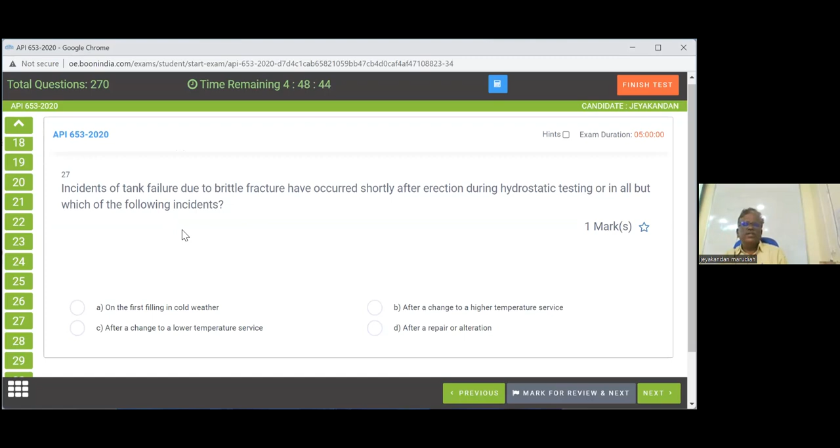Incidents of tank failures due to brittle fracture have occurred shortly after erection, during hydrostatic testing, or in all but which of the following incidents. So when is there a possibility of brittle fracture on first filling? Possible. After a change to lower temperature, or after change to higher temperature, it is not possible. Lower temperature, first filling, repair or alteration.

The risk of tank failure due to brittle fracture is considered minimal after what condition. So when is brittle fracture considered minimal? The tank has demonstrated ability to withstand the combined effect of maximum liquid level and lowest operating temperature - not highest. If it can withstand that, then brittle failure possibility is very low, it will not fail brittle. Combined intermediate - no, maximum liquid level - no. This is the answer.

Next, if it is decided to change the service to a more severe service, what is necessary? Consider the need for pneumatic test - no. Calculate the effect - no. Consider the need for hydrostatic test. If you are going for more severe service, you have to go for the hydrostatic test. If you have any doubts online, please ask questions.

Next, if a tank shell thickness is lesser than 0.5 inch and an evaluation in accordance with section 4 of API 653 has been performed, the risk of brittle fracture is considered to be minimal. So below what thickness? 0.5 inch. If it is 0.5 inch, then this is okay.

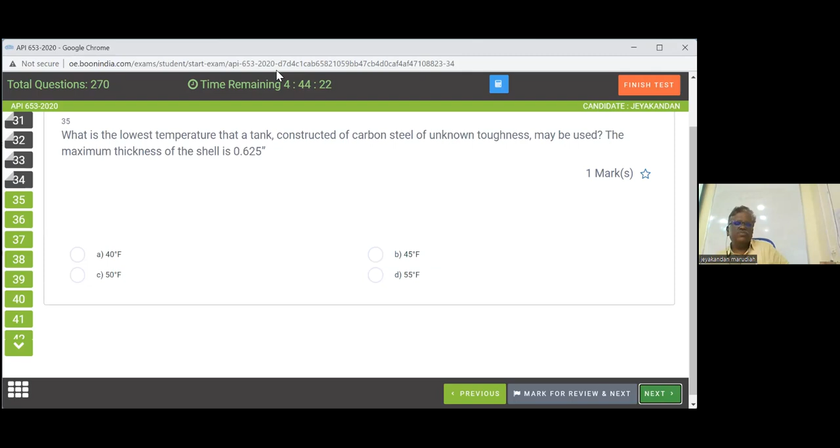Next, what is the lowest temperature that a tank constructed of carbon steel of unknown toughness may be used? The maximum thickness of the shell is 0.625. What temperature can we use? Lowest temperature for 0.625 inch thickness, safe for use. See, 0.625, this is 0.6. Somewhere around 45. So the answer is 45 degrees Fahrenheit.

Next, all new materials used for repair, alteration, and reconstruction shall conform to which of the following? One minute, it's okay, no problem. 36 to 42, 43, 50, 52. No problem, the current bit will fluctuate out. Okay, we'll switch it on again.

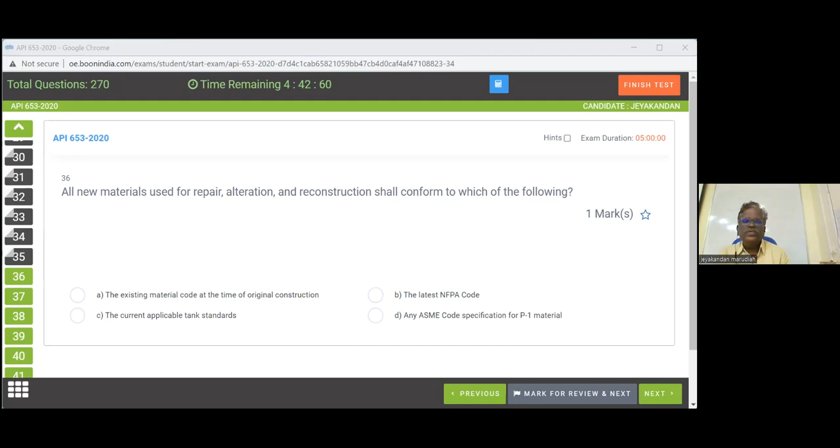So we completed 40, 35, 36 - this is actually from chapter 7. Just to check it, chapter 7. This is from chapter 7, 36 to 42, chapter 7. So the answer is - chapter 6 is later, will come later, no problem. Chapter 7: all new materials for construction shall conform to the current applicable standard.

Next, all shell plates and bottom plates welded to the shell shall be identified. Material identified by any of the following, except, does not require further identification. So, original contract drawing, suitable documentation, API nameplates - so these three are allowed. This one is not allowed. Where it is given, you can see here. Material identified by original contract drawing, API nameplates, or other suitable documentation does not require further identification.

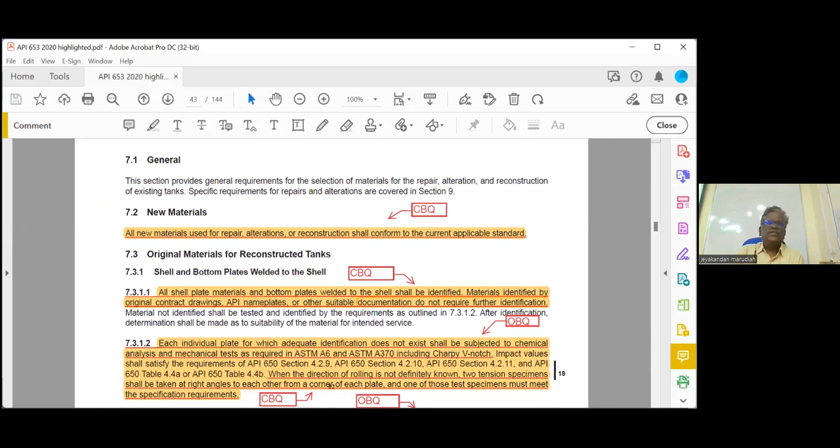Next question: each individual plate for which adequate identification cannot be made, the plate shall be - it is an open book question, just check and answer, which way it is.

I think the answer is A. ASTM A6 and ASTM A370, where it is given here. It does not subject to ASTM, including Charpy V-notch. Reference 7.3.1.2.

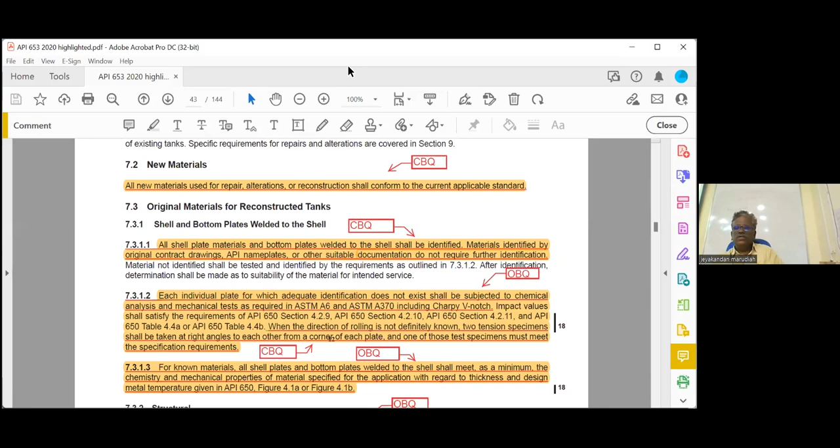Next question. Under what condition does API 653 require 2 tension specimens shall be taken at right angles to each other from a corner of each plate? One of these specimens must meet the specification. So when the direction of rolling is definitely not known, we have to take 2 specimens.

Next, it is permissible to reuse existing rolled structural shapes. So what specification applies? Which specification we have to use? We can see for existing rolled, ASTM A7; for new structural, ASTM A36 or A992. So ASTM A7 minimum.

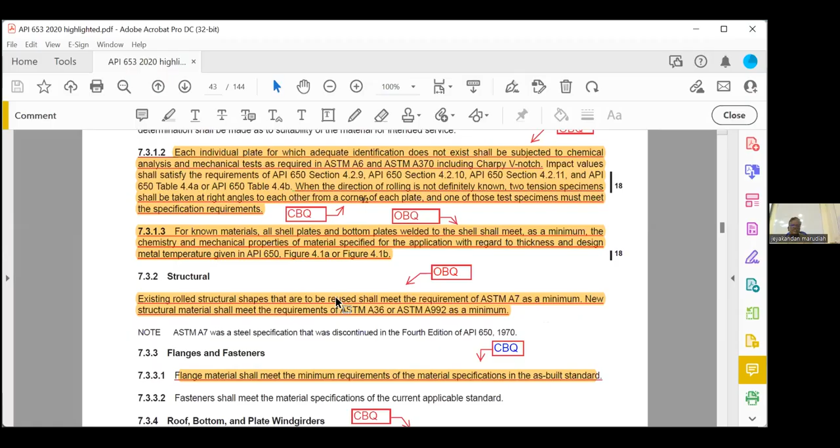If existing plates are to be used to reconstruct the tank, they shall be checked for which of the following? Existing plate used for reconstruction, they shall be checked for excessive corrosion and pitting. So you have to check for excessive corrosion and pitting.

Yes, there is 1 minute. Question 43 will be from chapter 8. We completed chapter 7, right? Okay, yeah, chapter 8, it is from chapter 8. We will come back to another chapter. Yes, next one. Reconstructed. No, this is completed, right? Okay, next.

43. Other than normal product loading shall be specified by owner, so design conditions other than normal by owner operator. Next chapter. Any specific design other than owner shall be specified by the owner operator, reference 8.1.

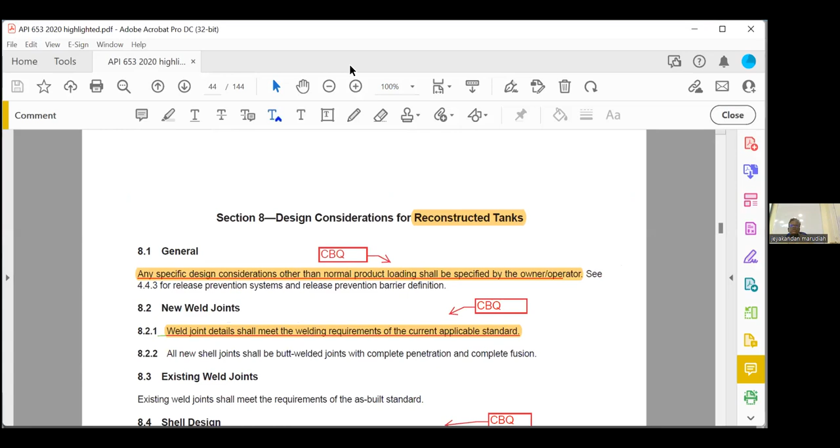Next, weld joint detail shall meet the requirements of each of the following. Is there a weld joint detail current applicable standard? These are closed book questions.

It has to be used for each shell course when checking tank design, shall be based on measurement taken within the 180 days, 6 months.

The maximum liquid level for hydro test shall be determined using which of the following? The nominal each shell course at the time of... the actual thickness, you have to measure it for each thickness, then calculate which one we have to use.

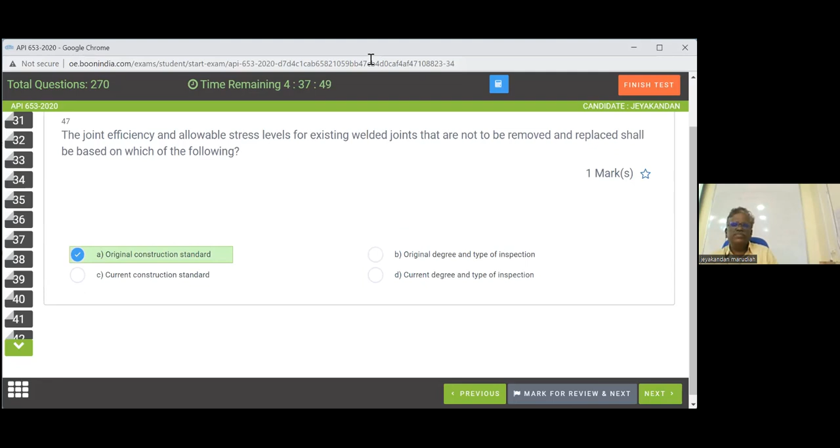The joint efficiency and allowable stress level for existing weld joints that are not to be removed and replaced shall be based on which of the following? If it is not removed, we can use the original construction standard - original degree and type of inspection. Not the original construction, but original degree and type of inspection.

Next, replacement and new penetration shall be designed, detailed, welded and examined to meet what requirements? Current applicable standard. Which one for replacement? Current applicable standard.

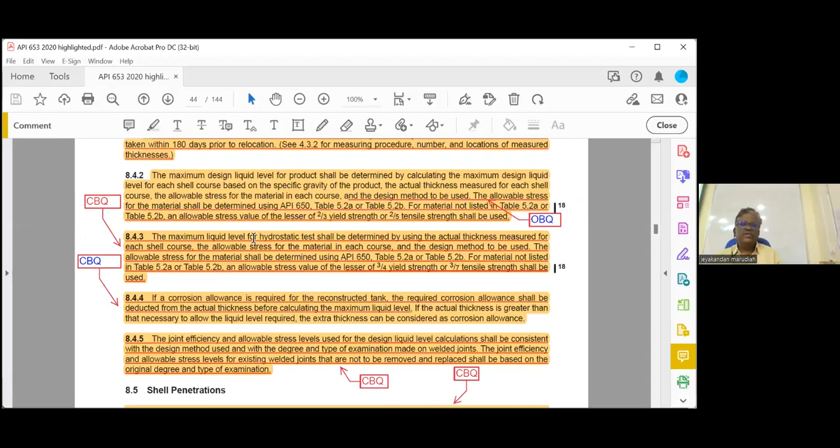Next, existing penetration shall be evaluated for compliance with what requirements? Existing penetration already there - as-built standard we have to follow. So for existing penetration, we have to follow the as-built standard.

One more, with regard to specific design, shall be built to meet the stability requirements of current applicable standard. Which of the following additional requirements may be used? You have to go for thickened bottom plates or anchoring of the tank. No, both - either A or B. You can go for anchoring of the tank also, you see that last paragraph, both are there.

Okay, 51. No, this is different, so the next chapter starts from 89. Okay, yes please, you read it. It is from chapter 6, questions 89 to 109. So we have to go for chapter 6, easy chapter, that's also. Yes please.

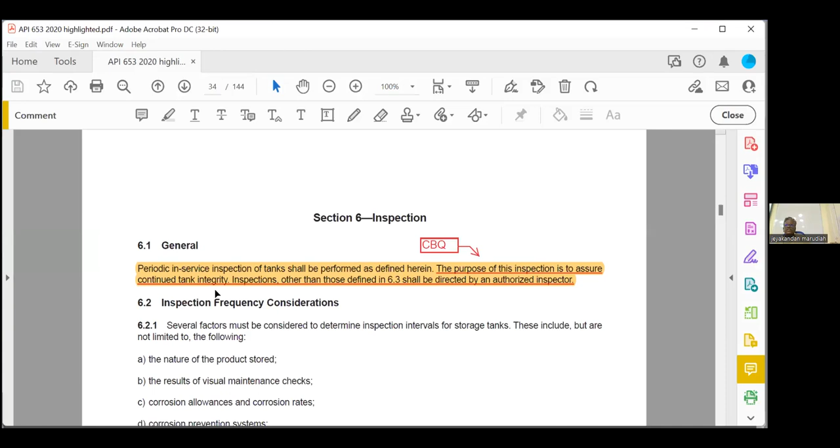What is the purpose of periodic in-service inspection? So it is to ensure continued tank integrity. Where it is in the code book, I think it's the first line - to assure the continued tank integrity.

Next, additional regulation may include all of jurisdiction, seal condition, leakage. So where is that - jurisdiction? This one, it is given here. Okay, jurisdiction, seal condition, leakage, this one.

Next question: visual inspection of above ground tanks are required. Answer is 1 month.

All tanks shall be given a visual external inspection by the inspector at what limits? Visual external inspection at least 5 years, or the quarter of remaining life, whichever is less. Remaining life is RCA by N. Answer is C. Remaining life of the shell, not bottom.

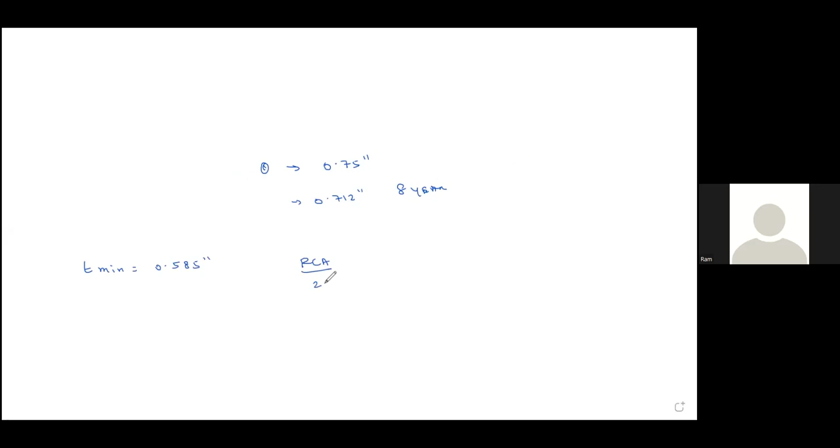What is the formula? RCA by 2N. What is the RCA? Remaining corrosion allowance is 0.712 minus 0.585, this is the remaining corrosion allowance. So 0.712 minus 0.585 equals 0.127. This is the corrosion allowance, we have to take these two values.

So N is equal to 0.75 minus 0.712 divided by 8 years. That gives 0.00475 inch per year.

So here, 0.127 divided by 2 into 0.00475. If you put it as 0.127 divided by 2, multiplied by 0.00475, you will get 13.36 years. So the answer is 13 years.

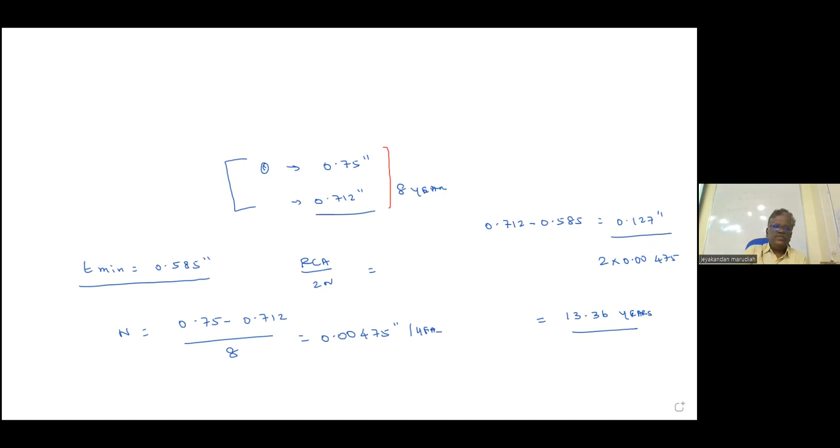This is the way you have to do it. So remaining corrosion allowance means T last reading minus minimum reading. Corrosion rate means between any two readings and a number of years. Previously, only two readings they will take. So the answer is 13 years. Next one, please.

Internal inspections are primarily likely to do all but which of the following? All means except, but all but means except: ensure the internal surfaces are thoroughly cleaned and periodically identify, evaluate tank bottom not severely corroded, gather data for analysis. So answer is A. So where it is given, the purpose of internal bottom inspection.

We have to go to the internal bottom section, here there is 6411, you can see here. A primary record ensures the bottom is not severely corroded, gather the data necessary, and identify tank bottom settlement.

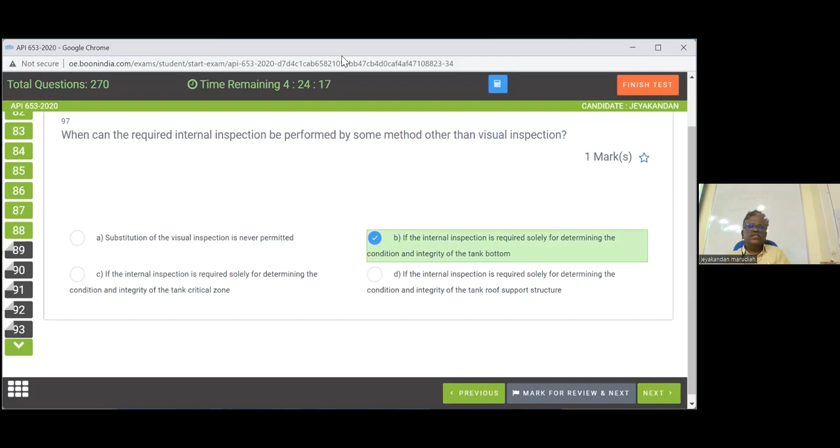When can the required internal inspection record be other than visual? Never permitted, unless the internal inspection is required solely for determining the condition integrity of the tank bottom. If the internal inspection is required solely for the purpose of determining the condition integrity of the tank bottom, the internal inspection may be accomplished with the tank in service, replacing it with robotic ultrasonic measurement. No need for visual inspection.

Next question, please: intervals defined by the standard, who is required to conduct? It is given here: for all tanks internal inspection, the authorized inspector shall supervise or conduct the visual examination, so it will either be the person designated or the authorized inspector.

Interval between internal inspections shall be determined by the program, measured during previous inspection, or anticipated based on experience with tanks in similar service. The internal inspection intervals shall not exceed how many years without release prevention barrier? If you add everything, that is 20 years, generally. Yes, 20 years is correct, without release prevention barrier.

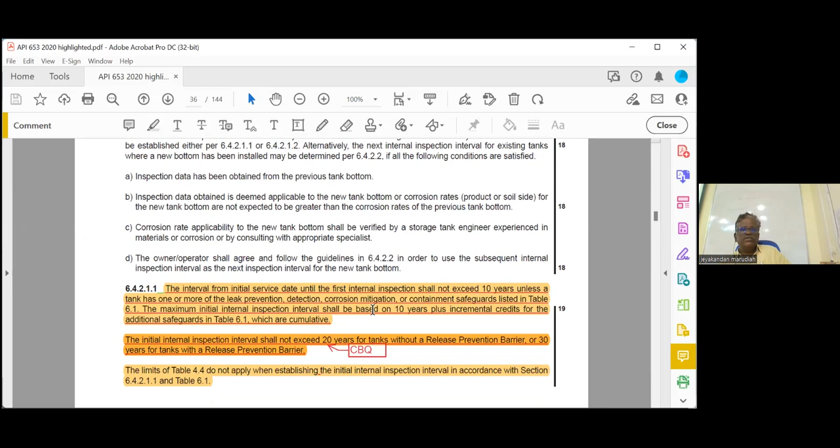Next: recommended practices dealing with the prevention of hydrocarbon emission are covered by API 2003. Where is it given? API 2003.

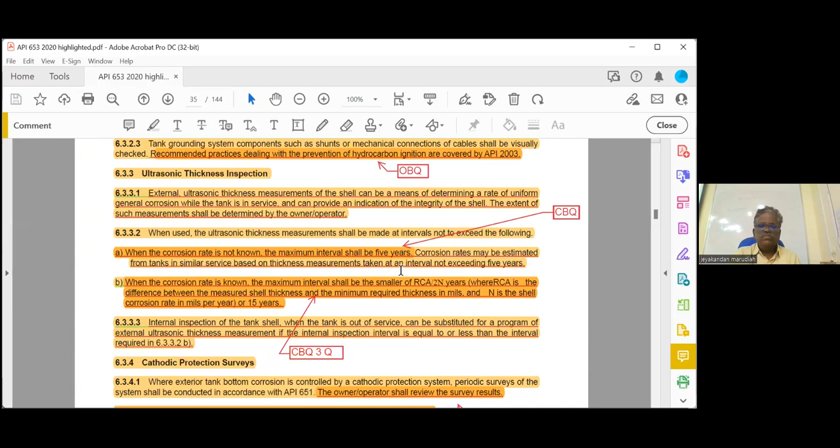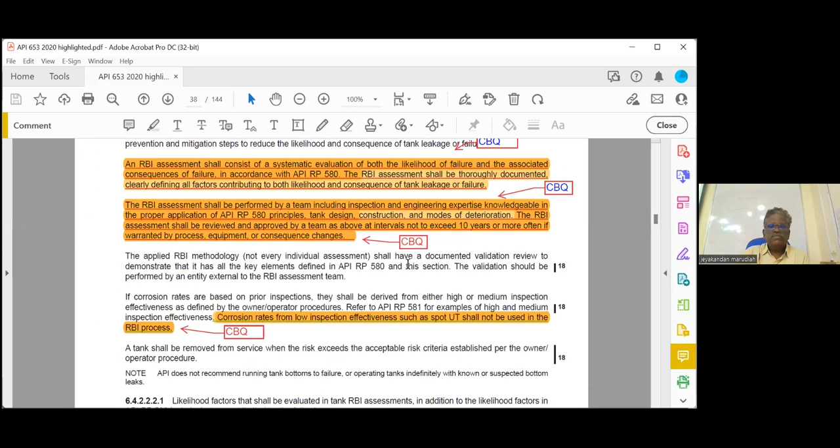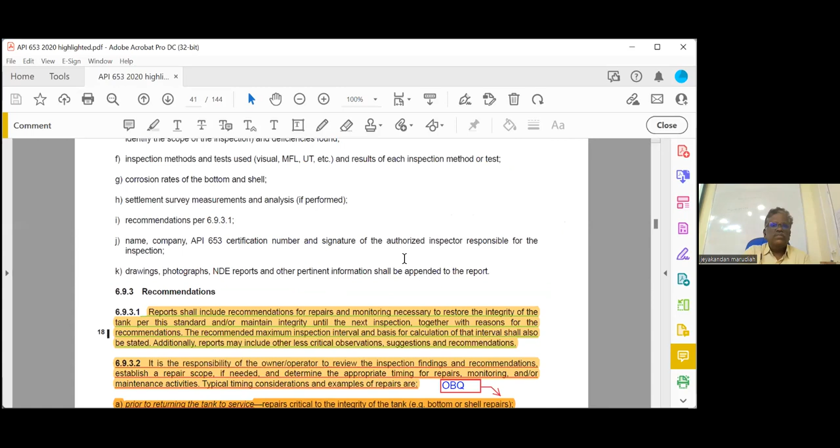Where is this given? API 653, Chapter 6, section 6.3.2.3 - it is given there. Recommended practice for prevention of hydrocarbon is covered in API 2003.

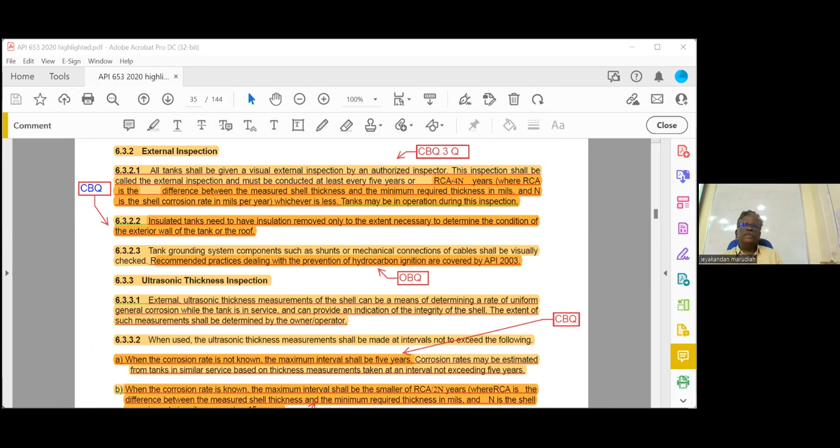Okay next, the following recognized and related to internal inspection. What is the negative alternative for the internal inspection? Risk based? No. Hydrostatically performing complete - no. Hydrostatically testing the tank - no. Perform complete calculation - no, it does not. Alter internal inspection interval - no, you can go RBI. RBI can be used to set the interval.

Okay so where is it given? Section 6.4. As an alternative, establishing the risk-based inspection can be performed.

Okay next, for existing tank owner that review the internal inspection interval and be in compliance with this section within 10 years - this is given here.

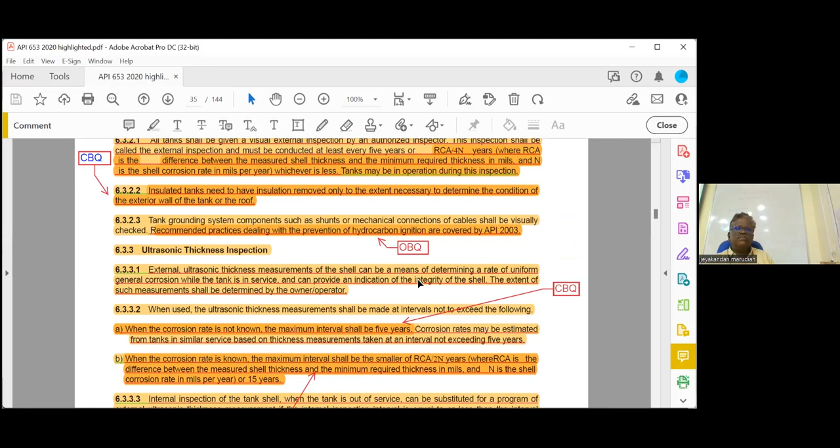Question, read the question - for existing tank owner shall review the internal inspection and be in compliance with the section within. So internal inspection we have to check.

Okay, here, 6.4.2. For existing tank owner shall review the internal inspection interval to be in compliance with the section within 5 years, not 10 years. Here, section 6.4.2.1, you have to follow this one and implement within 5 years, not 10 years.

Next, owner is required to maintain complete record file consisting of 3 types, not the 3 types. Repair is there, alteration is there, construction is there, full cycle - there is no full cycle.

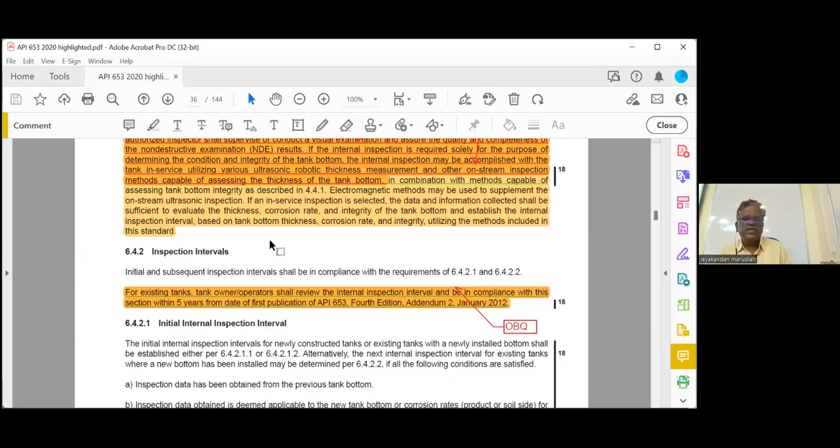Next, if an RBI is performed, the maximum interval covered in this section does not apply - so from here we have to answer it. For RBI this will not apply here. High viscous substance, you can see here - open book question - high viscous substance which is solidified at temperature below 110, any substance mixture not identified as hazardous chemical.

This one, okay so here high viscous substance at 110 - any of the above, all are the answers. Open book question. RBI assessment has been performed here, section 6.4.2.1.2 - if an RBI assessment has been performed, 1, 2, A, B, all these things apply.

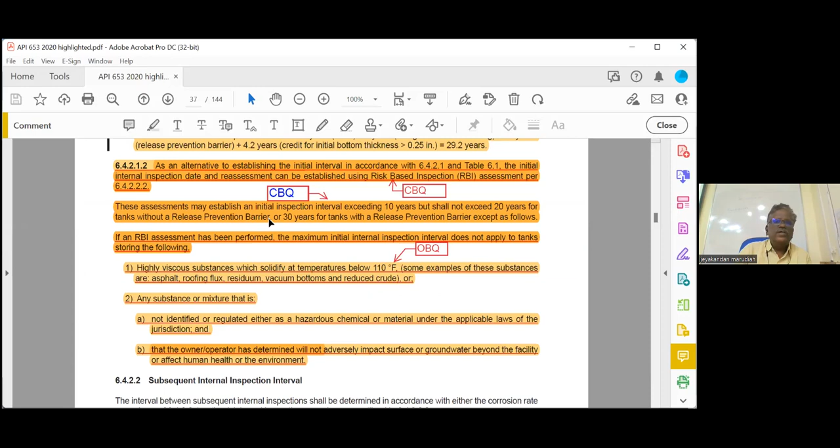Here, it is here, section 6.4.2.2.1 - the RBI shall be reviewed and approved by the team at about 10, not 10 years or more, often if warranted by process equipment consequence changes. Section 6.4.2.2.2.

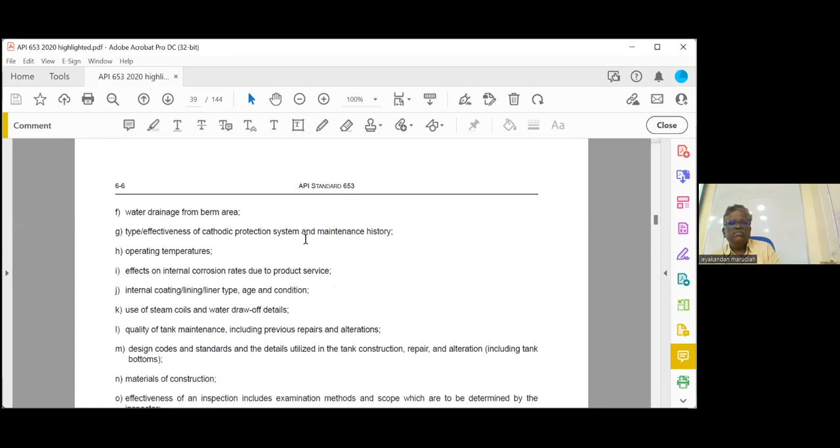Next, in case where construction, size, or other aspects allow external access to the tank bottom. So external inspection is allowed, because in case it allows external access, from the bottom side we can inspect - where it is given: page 6-7, section 6.5. In case where construction, size, or other aspects allow external access, so external inspection like internal inspection is allowed. Section 6.5, yes, 6.5.

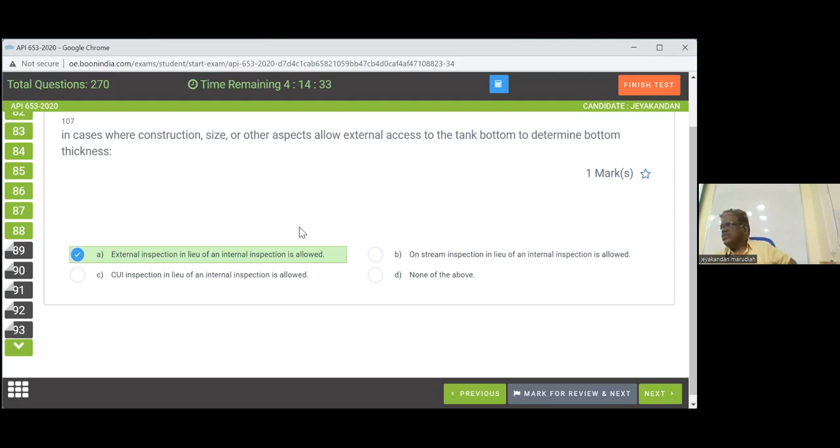Right, internal actually is not majorly visual only. Visual also, but only thing is, by visual only we cannot find everything. Visual can find if there is a leakage at the bottom also we can find it. Corrosion we will only check using either MFL or UT, that we can do from bottom side also. Visual is not mandatory for it - when visual is not mandatory, only thickness measurement you are going to do, you can use the robot also.

Calculate it - remaining corrosion allowance there. What is the formula for the external inspection? RCA by 4N - RCA they have given, N also they have given. Okay this is, remaining corrosion allowance is RCA, 0.15 divided by 4 into N, so 4 into 0.01, so you'll get 3.75 years.

3.75, so they rounded it actually - 3.5 years and 7 years. 3.5 or double - this is for the external, that will come to 3.75 something, so the nearest answer is 3.5. The thickness measurement is RCA by 2N - double, 3.5 into 2 na, 7 years it will come, because here it cannot be more than 5 years, and here it cannot be more than 15 years. So 3.5 into 2, 7 years - exact answer should be 3.75 into 2, 7.5 years. Okay.

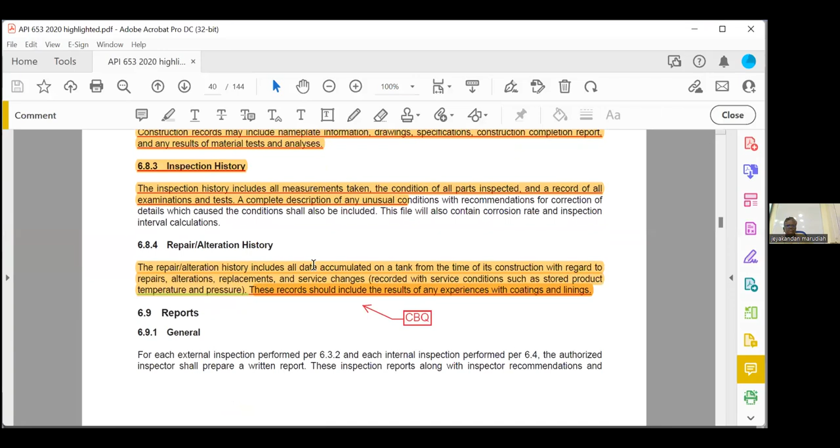Which is the question number? No, 109 - no this is different, this is not from this chapter. Okay, this is not from this chapter, leave it.

Right, so now we will go to the - we have completed, we will go to 217. Okay, API 650 and the supplements given in 653 - C is the answer, but it is from the 10th chapter, we have not yet covered. So we will go to chapter 9.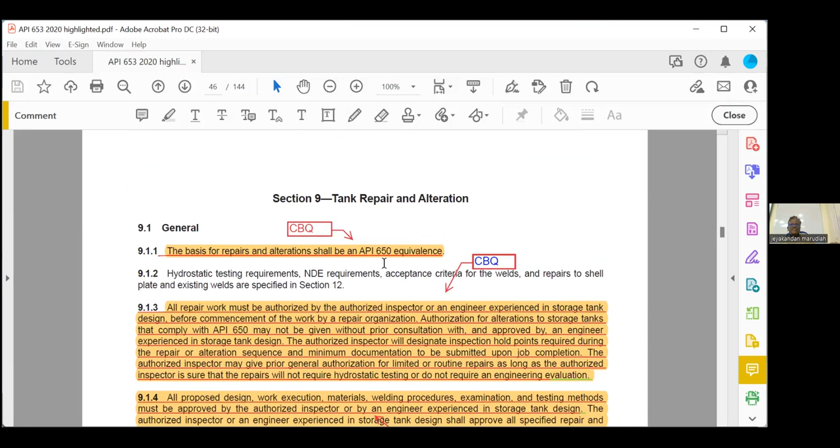The basis and alteration shall be 650 or equivalent. It is not 653, the answer is 650.

Okay, next, minimum dimension shall be... Replacement, you know this is a replacement, not shall. There should be no shall here. Replacement plate shall be dash inches or dash times the thickness of the replacement, whichever is dash. B, sir, B, 12 times, so answer is B. 12 inch, 12 inches, 12 times, whichever, and answer is A. 12 inch or 12 times thickness, whichever is greater.

Okay, so it is given here. The minimum dimension, here you can say 12 inch or 12 times replacement, whichever is greater. 9221, 9221, 12 inch or 12 times, whichever is greater.

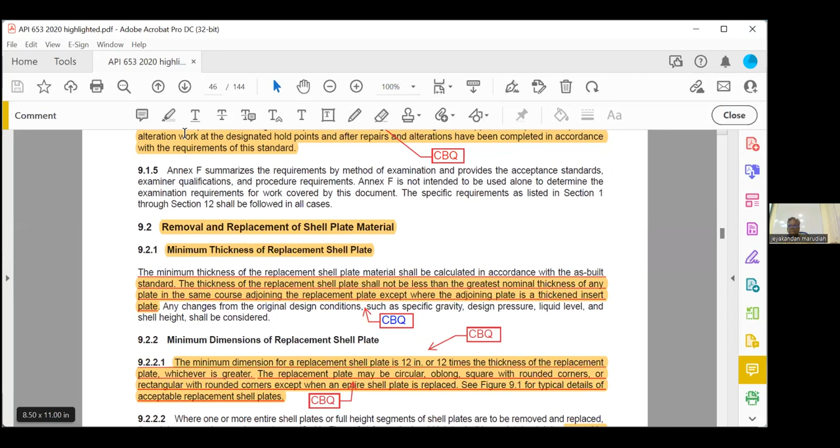Okay, next question. Unless an entire shell plate is replaced, the replacement plate may be circular, oblong, square, or rectangular, provided the corners are... unless your entire shell is, what should be the, 3 inches. Replacement provided the corners are rounded, that's all. Others are not the answer, there is no 1 inch.

What is the radius? 6 inch or 6t. But here there is no 6 and 60. They should have rounded corners, that is the answer. Where it is given? Here it is given, here you can see. The replacement may be circular, oblong, square with rounded corners.

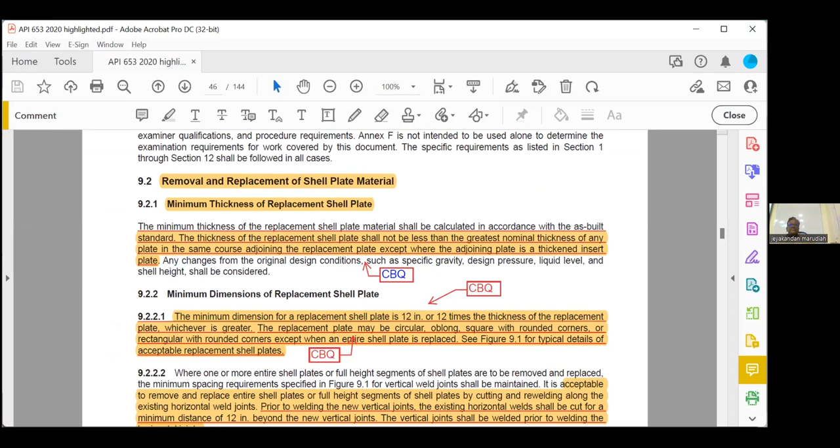9221, next line. Next question. Okay, prior to welding the new vertical joint, the existing horizontal joint shall be cut for a minimum distance of... answer is 12 inches. So for a vertical joint you have to cut horizontal 12 inch on both sides. I explained this morning. Okay, 12 inches beyond the new vertical joint. Okay, where it is given, no need, you can know. Okay, next.

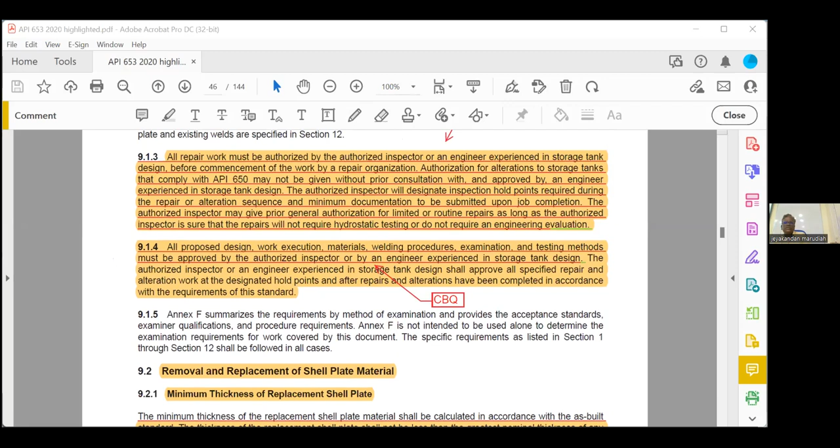Existing shell, over the outer edge of the butt weld attaching the replacement shall be at least dash times the weld thickness, inches greater than any existing butt welded joints. I told you, they are asking about more than half an inch thickness distance from any butt welded joints. So which one do you have to refer? You can refer here and answer it.

VH, what is VH, more than half an inch? Greater of 10 inch or 8 times. We can see the sketch and answer. 10 inch or 8 times, but it is given in the paragraph also here, never, from there only they took it. Over half an inch, 8 inch or 10 inch, 8 times or 10 inch, that is the same sketch only.

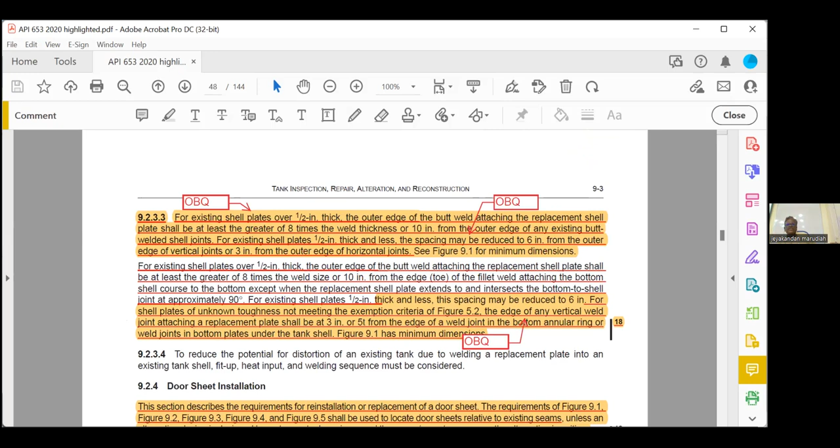10 inch or 8 times, or 8 inch or 10 times, or 8 times or 10 inch. Okay, so here which one is the answer? 8 inch or 10 times.

So has it been given in reverse? At least greater of 10 inch or 8. Okay, so first what comes? 8 times thickness or 10 inch.

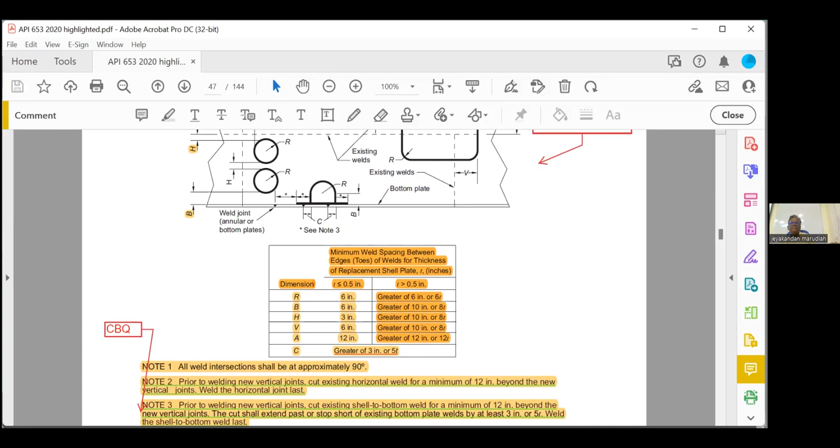Yes please, next one. For existing shell plate, half inch thickness, outer edge of the butt weld attaching the replacement shell plate may be reduced dash inch from the outer edge of the vertical, or dash inch from the outer edge of the horizontal. So now I told, less than say half an inch, how much, vertical how much, look at that sketch.

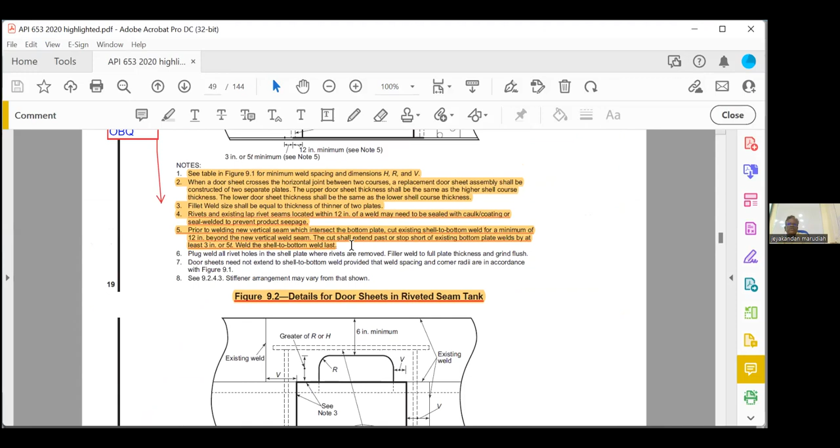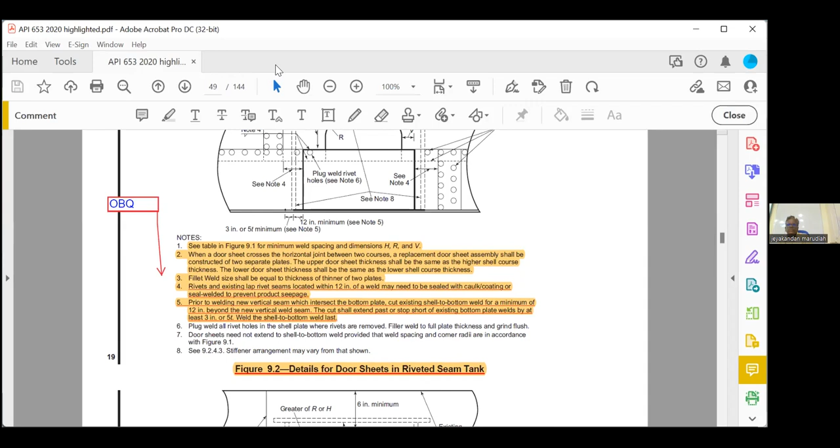Here, this sketch, page number 9-4. Rivets and existing lap rivet seams located 12 inch from the weld and it may be sealed, caulked, or coated. The answer is any of the above - caulk or coating.

Lapped patch repairs are an acceptable form of repair for butt welded, lap welded, riveted tanks when specified by owner operator. When owner operator says only, we can go for a lap patch.

Lapped shell repairs are not permitted on shell courses exceeding what thickness? Half an inch. When the shell thickness is more than half an inch, lap patches are not permitted. Just work out this question 2-3 times, everything will be in memory.

When a lapped patch shell repair is used, what is the minimum thickness for the repair? Not less than 3 by 16. 3 by 16 is 0.1875 inch, which is about 5mm. Any plate minimum thickness allowed is 5mm for lap patch.

The corner radius and maximum dimension of the lap repair plate, vertically and horizontally, shall not exceed - vertical 48, horizontal 72.

Next, the minimum lap repair plate dimension is what? 4 inch. Minimum limit is 4 inch.

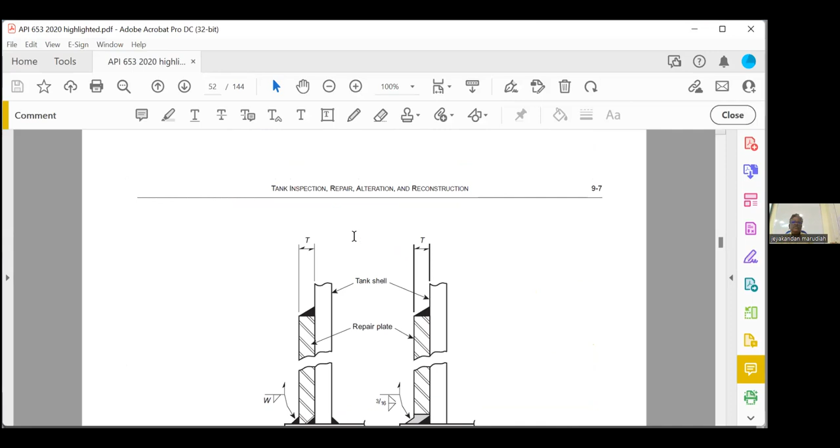The lap repair plate may cross any butt, whether vertical or horizontal seam, that has been ground flush, overlapping a minimum on the other side. Minimum 6 inch it has to overlap. The condition for lap patch: it should overlap a minimum of 6 inch beyond the shell seams, both vertical and horizontal, ground flush plus 6 inch.

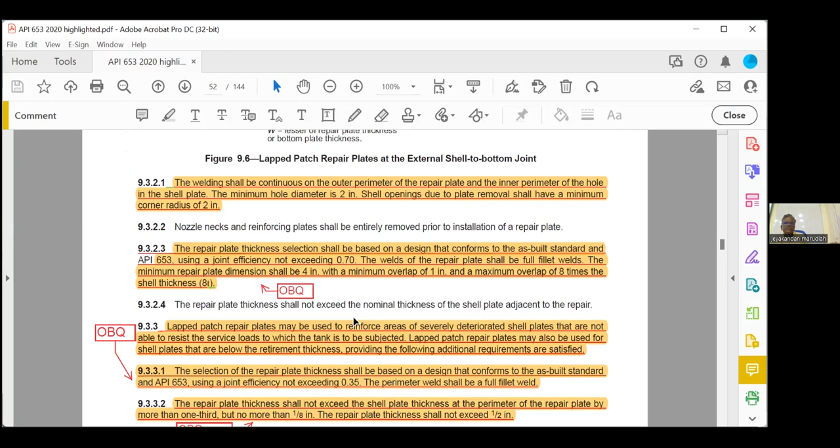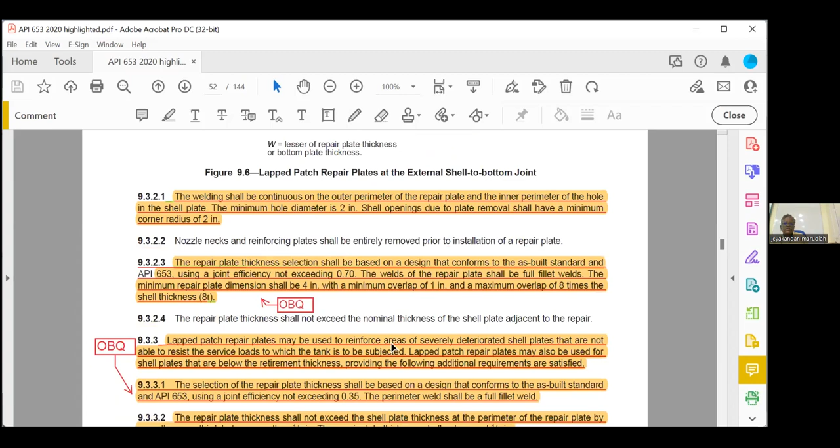Reinforced corroded area, the closure holes. 933 states plates may be used to reinforce area severely deteriorated. The selection of the repair thickness shall be based on conformance to as-built standard under 653 using joint efficiency 0.35. The answer is based on the as-built standard, latest edition of as-built construction under 653. Answer is B. As-built construction under API 653, where it is given here - 9331, you can see 933 may be used to reinforce area. From that continuation 9331.

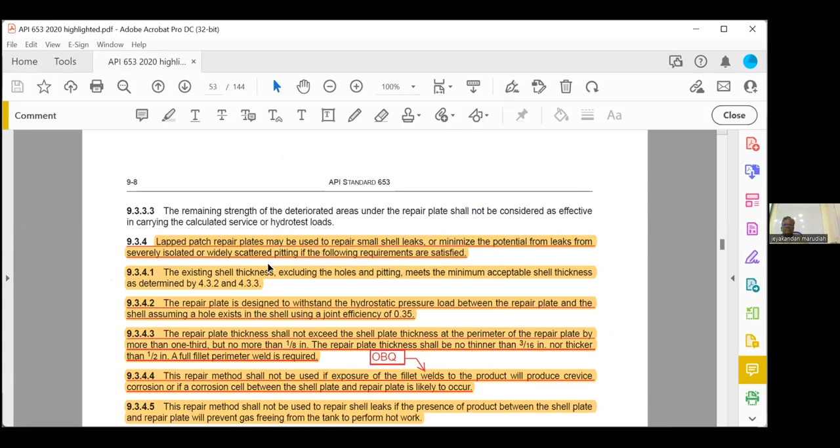So where it is given, next page: lap may be used for small leaks to minimize the potential leak while following the requirements - the existing thickness, the repair plate must withstand the hydrostatic pressure. The repair method must not use fillet weld in a way that produces crevice corrosion between the shell plate and the repair plate. So the answer is here.

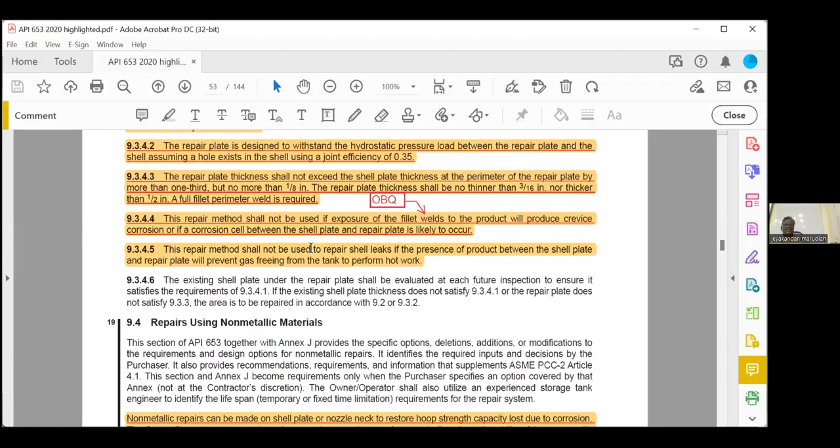Answer is D. Next: alteration of a tank shell by the addition of new courses. Current applicable standard. Alteration, current applicable standard - anything newly done, we have to follow the current applicable standard.

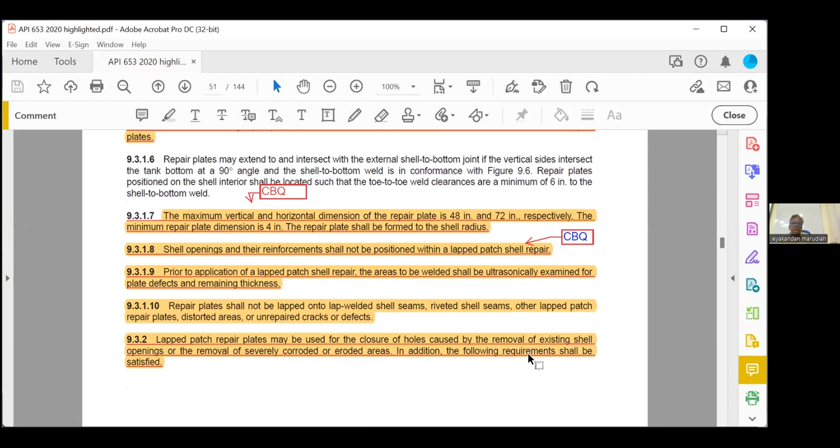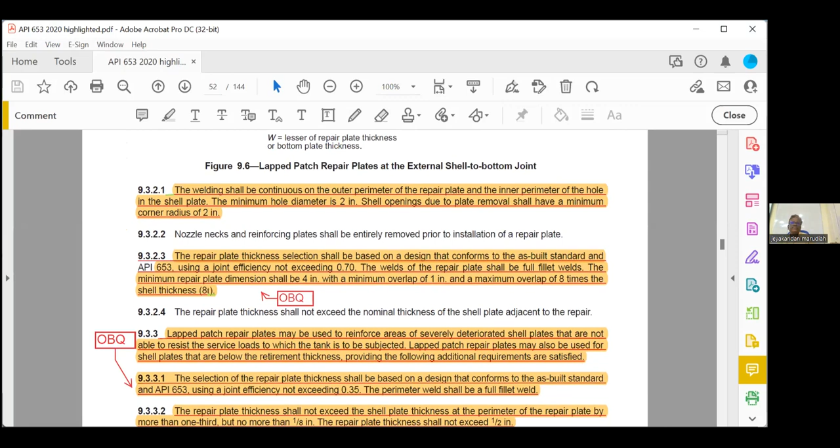Next: the addition or replacement of shell penetration. Addition of reinforcement shall be in accordance with API 650 and this standard. So 650 and 653, 650 and 653 - we have to follow both standards.

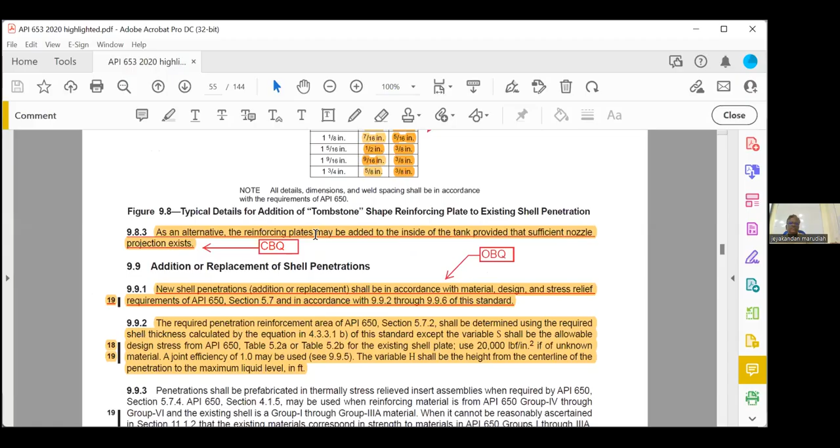Next: installation or replacement of shell penetration. The penetration is closer than 12 inch, the shell plate is greater than, and the shell plate does not meet the current temperature criteria. Check this - installation or replacement of shell penetration greater than 4 inch. Here 9.9.6: Penetration larger shall be installed with the use of an insert plate or thickened insert plate if the shell plate thickness is greater than half an inch and the shell plate does not meet the current design temperature criteria.

Next: an 8-inch diameter penetration is to be installed in the shell which requires an insert plate. What is the insert plate size? I told it two times - morning we worked out 8 times 2 equals 16, or 8 plus 12, whichever is greater. So 8 plus 12 will be 20. See where it is given in the next paragraph: the circular minimum diameter shall be the greater of twice the diameter of the opening - so 8 into 2 is 16 - or diameter of the opening plus 12 inch, whichever is greater. So we have to put 20 inch.

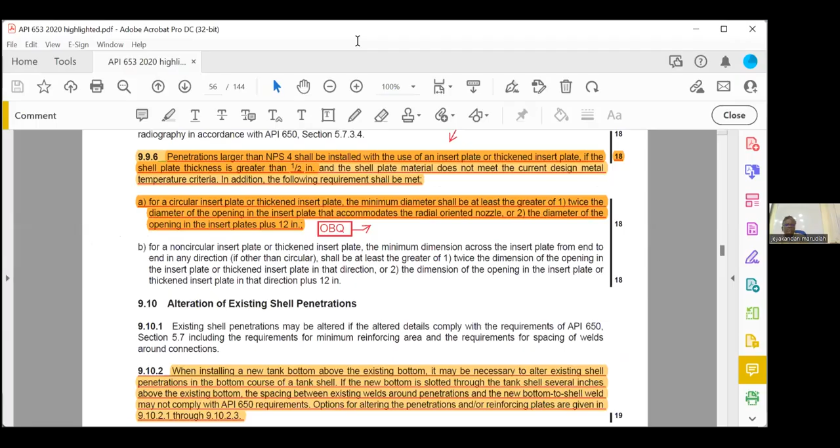Next: weld joints that have experienced unacceptable loss due to metallurgical processes - removed and replaced, removed by grinding, or removed from service. Many welded joints experience unacceptable loss due to corrosion. Weld repair - it will be here. Welds experiencing unacceptable corrosion shall be repaired by grinding and/or welding, 9.7.4.

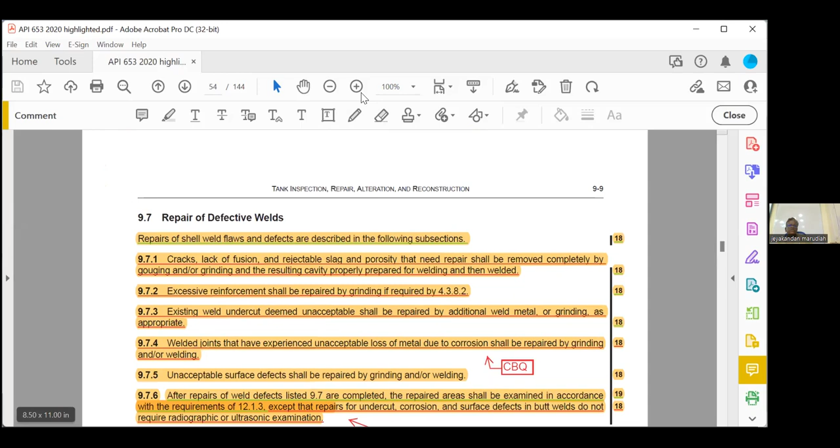Repair by grinding and/or welding. Okay next: integral reinforcement design is used, except taper at 1:4. Very simple. Okay next: what is necessary to alter the existing system?

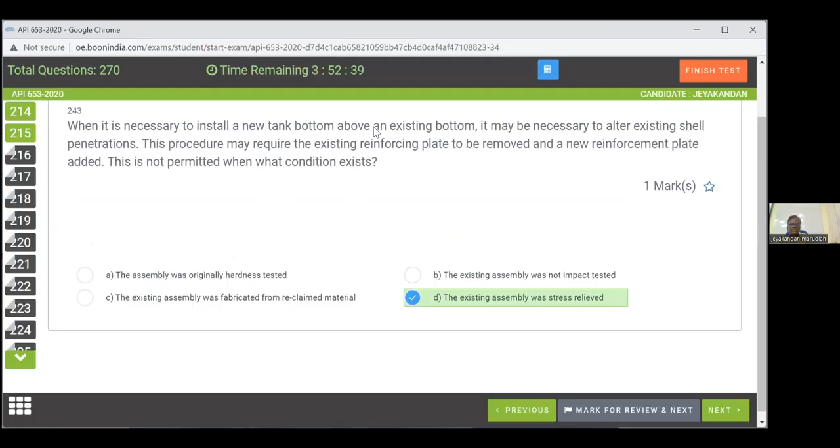This is produced by existing reinforcement - this is not permitted if the assembly was originally post heat treated. Stress relief - when it is not allowed to cut this, where is it given? In remove bottom, 9.10.2. See here 9.10.2: the existing reinforcement may be removed and new reinforcement added, except that reinforcing is not permitted in stress relieved assemblies.

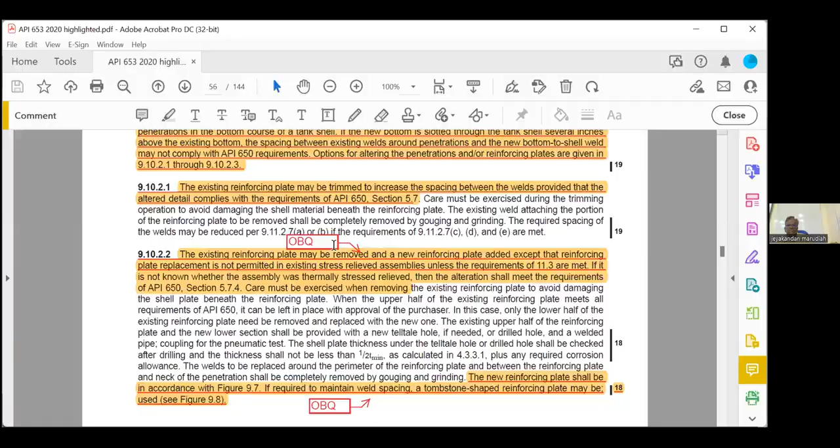Next: it is necessary to install a new tank bottom level - maybe necessary to install new reinforcement in order to maintain weld spacing, what shape reinforcement? Tombstone - so tombstone we can use. You can see here: if required to maintain weld spacing, tombstone shaped reinforcement may be used, 9.10.2.2 last line.

Next: possible minimum size between the shell and reinforcement. What should be the minimum weld size between the shell penetration and the reinforcement plate? So we have to see the sketch - 1 inch thickness.

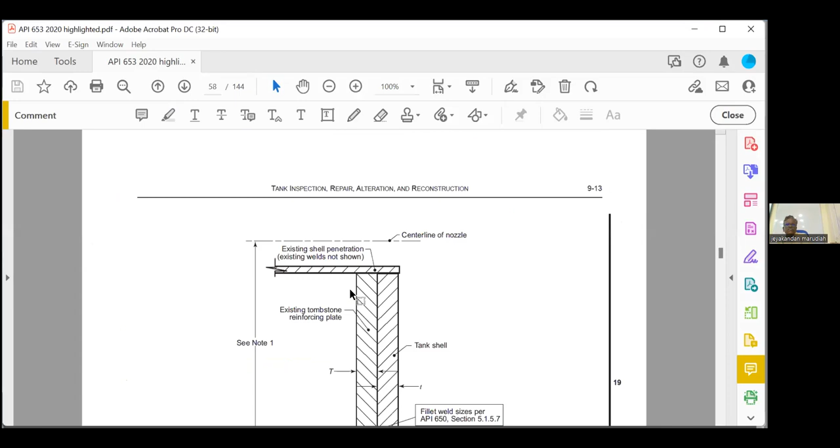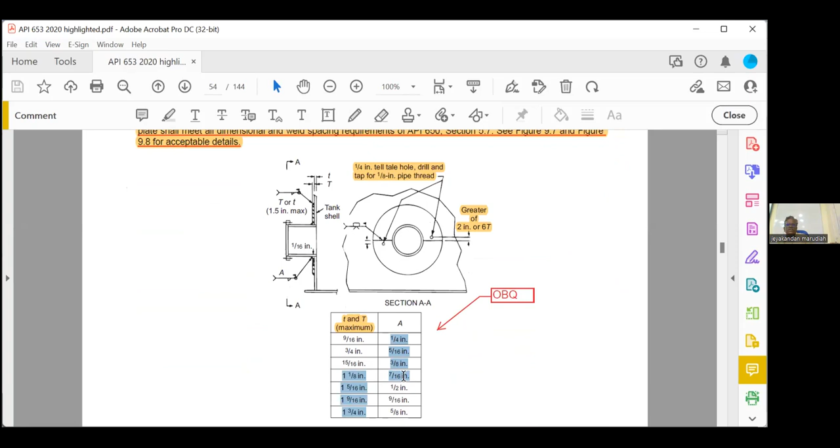Where is the sketch? This sketch you have to see - here, shell penetration and the reinforcement. For 1 inch, here 7 by 16 inch, it should be A dimension. Page number 9-9, shell penetration and the reinforcement. This is A, so 1 inch they have given, but there is no 1 inch. Higher than 1 inch is 1 1/8, is 7 by 16 inch. You can see here, 7 by 16 inch. Plate 1 inch shell thickness, shell penetration and the reinforcement.

What is the minimum weld size between shell penetration and reinforcement plate? This sketch we have to refer - this is the shell penetration, this is the reinforcement A. So what is for 1 inch? There is no 1 inch given. 15 by 16 is less than 1 inch, so we have to take a little bit more than 1 inch. The answer is A is 7 by 16 inch. If they ask what is the dimension between shell to bottom weld, then next page, we can refer here also. Both A and B are given. If you take A 7 by 16, B 5 by 16. A you can refer from here also, same only here.

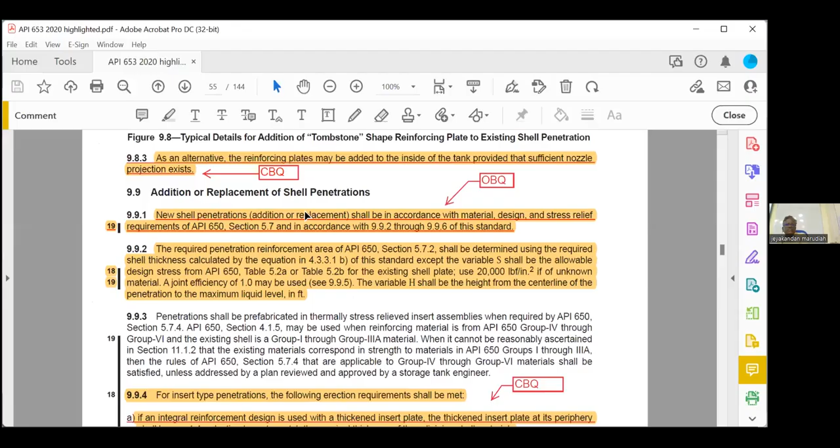Next, more extensive repairs - what must be done with the bottom? Bottom plate, the bottom plate shall cut out and new plate installed. I think this is the correct answer. When more repairs in critical zone, we have to replace the plate. Where it is given - critical zone repair we have to do.

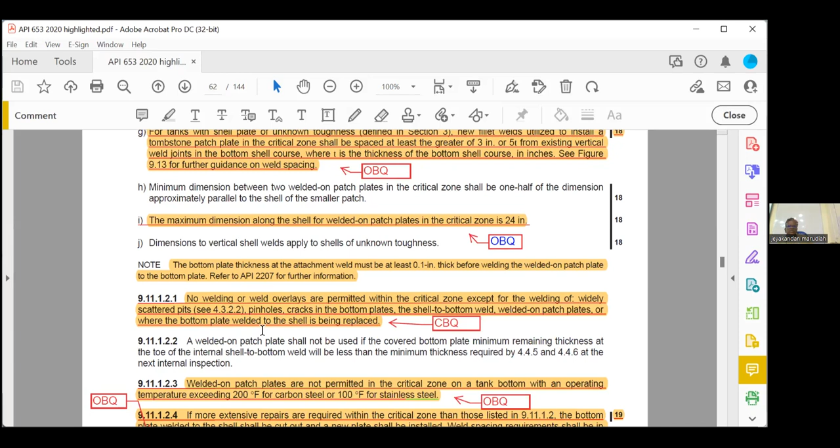Here it's 9.11.1.2.1. No welding permitted except widely scattered pits where the bottom plate welded to the shell - no, that is not that one. Here 9.11.1.2.4: if more extensive repairs are required within the critical zone, the bottom plate shall be cut out and a new plate shall be installed. 9.11.1.2.4.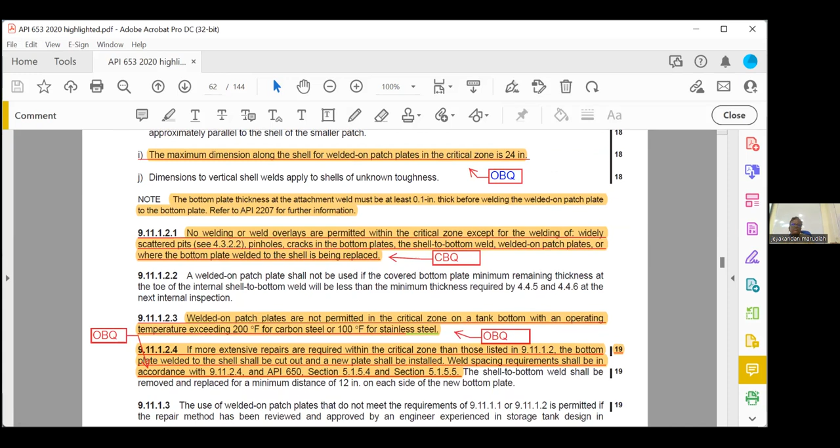Next, when a new tank bottom has been installed in a floating tank, what condition must be for the floating roof? The support leg can either remain the same length or shortened by the same amount. So we can shorten also.

Next, which of the following is not acceptable in an existing tank bottom? Cutting the shell parallel to the minimum half an inch, that is allowed. Remove the entire bottom - we have to refer this and answer. When it is cutting the tank bottom, replacement of tank bottom, here 9.11.23. Check this and answer this question. I will show you the question, which one is not correct. Which of the following is not acceptable? Just a minute, I am coming. Answer this question.

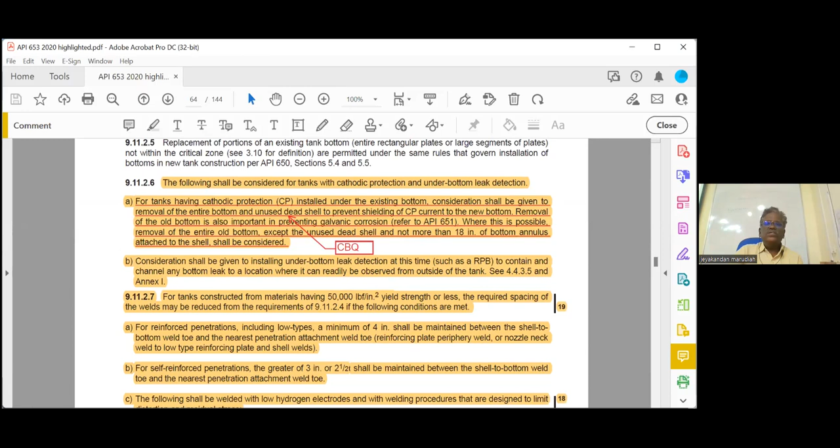Removal of entire bottom and unused dead shell, removal of unused dead shell - now we have to check it for cathodic protection. Consideration shall be given to removal of entire bottom and unused dead shell to prevent the shielding of CP from this - it is also important. So the galvanic corrosion, this is the one. Entire bottom to prevent from the new bottom.

Next, all arc-gouged areas of the tank shell-to-bottom weld is magnetic particle tested. Where it is given? Next page. All are gouged areas, 9.11.23, yeah, okay, right here only - all gouged areas magnetic particle, 9.11.23, last slide.

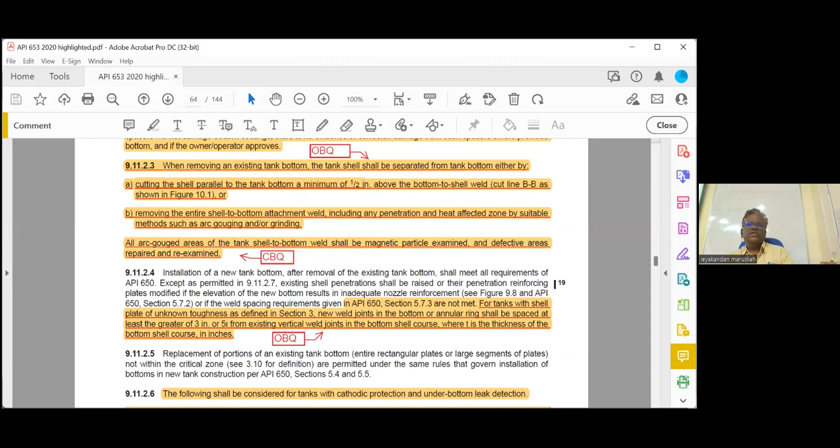Next, to minimize evaporation losses and reduce, no more than 1/4 of the roof seal system should be out, not more than 1/4. Where it is given? Next page, I think - here. No more than 1/4, 9.14.1.

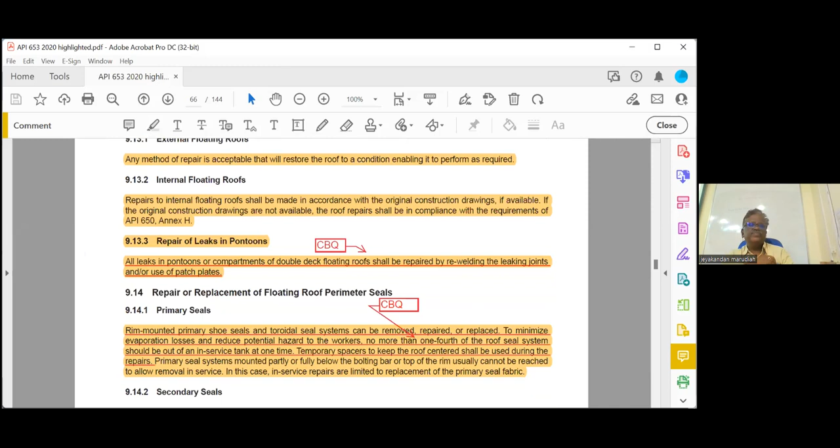Next one, mechanical damage to floating roof - repairs, can be repaired or replaced. How about buckling parts? Buckled parts may be removed straight - no, not straight. They may not be straightened in place, they shall be replaced. Where it is given? 9.14 for mechanical, buckled part shall be replaced, last line. Yes, not straightened - straightened is not allowed.

Next question, with regard to installation of primary and secondary seal, what must be done? The rim shall be thoroughly inspected for damage. New rim shall be 3/16 inch minimum. Where it is given? 9.14.6, 14.6.2 - new rim 3/16.

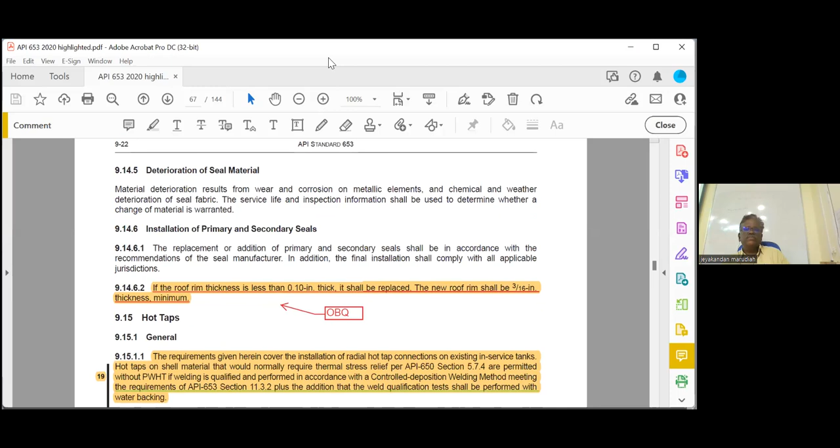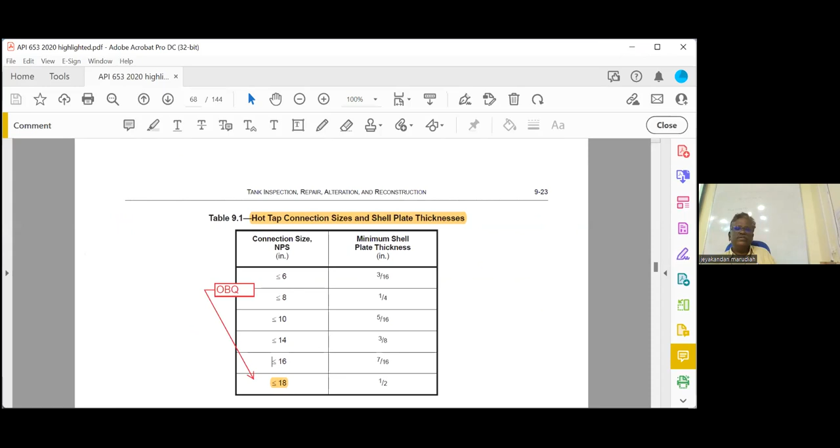Okay, next, what is the maximum hot tap connection to repair service? Recognized toughness means you have to refer the table. So for 3 by 8 inch, see the table, how much it is allowed, on the next page. 3 by 8 inch, NPS 14 - that is the maximum size. So we have to refer this table. NPS 14. Yeah, okay. Next.

What is the maximum diameter of tap connection? Unknown toughness, NPS 4. So where is it given here? You can see, for unknown toughness, for tanks, the nozzle shall be limited to a maximum diameter of NPS 4.

Next, what is the minimum height of the tank related to the hot tap? It should be at least 3 feet, not below, above. The tank 3 feet below the hot tap - no, 3 feet above the hot tap location, above 3 feet, not below 3 feet. Now for hot tap there should be liquid. See here where it is given - 3 feet above the hot tapping operation. Section 15.12.

Next, hot taps are not permitted. So it is not permitted where the heat of welding may cause damage, where the area is laminated, or severely pitted - all of the above.

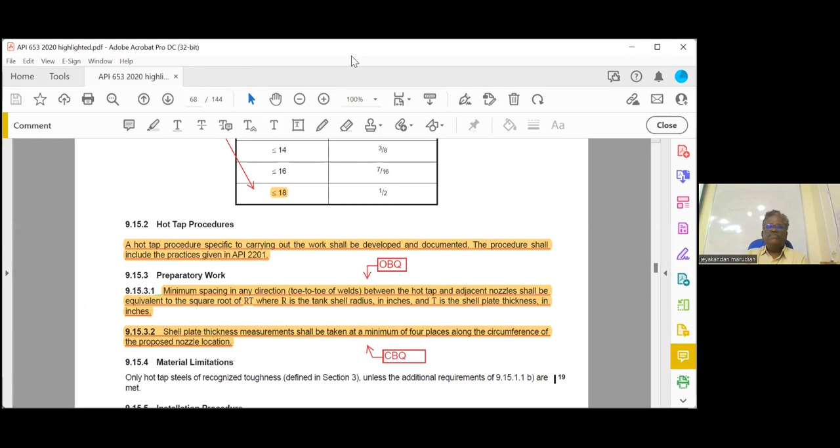Now what is the doubt? See, diameter is 110 feet. Tank diameter 110, half of the diameter is the radius. But what is the radius? 55 feet - convert it to inches, multiply by 12, we'll get the radius in inches. Because how to convert that to inches? That will be 660. Then thickness T is 0.75, so the answer is 22.24. I think the answer is correct.

Okay, next one. Yes please - shell plate thickness measurement shall be taken at a minimum of, let's say, 4 places. We have to take it along 4 places.

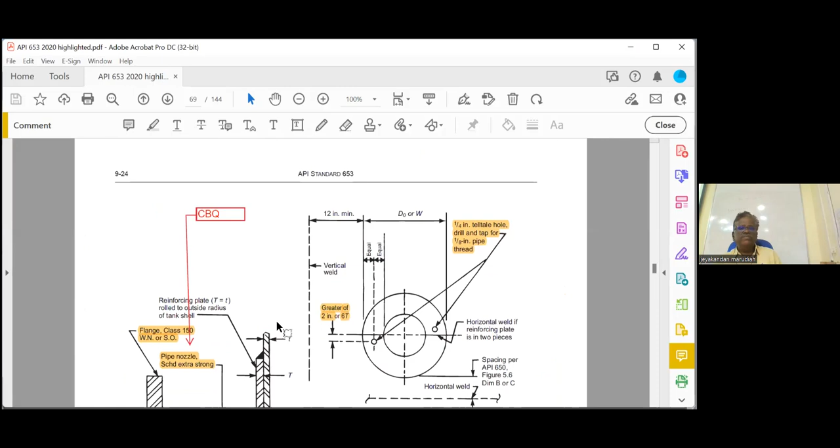Next, the hot tap nozzle pipe thickness is found to be extra strong - in the sketch you can see extra strong, it should be XS pipe. Yes, next - after the valve has been installed, the valve has to withstand at least 1.5 times hydrostatic head, or this - all the requirements are given here. See, 1.5 times hydrostatic head, it is given here, section 9.15.53. The pipe nozzle extra strong requirement is given here.

All leaks in pontoons or compartments of double deck floating roofs shall be repaired - rewelding the leaking joints, or the use of replacement patch plates, A or B. Leaking in pontoons and compartments - where is it? Let me check. Pontoon and compartments... okay, not in hot tap. Leaks shall be repaired by rewelding of leaking joints and use of patch plates, A and B.

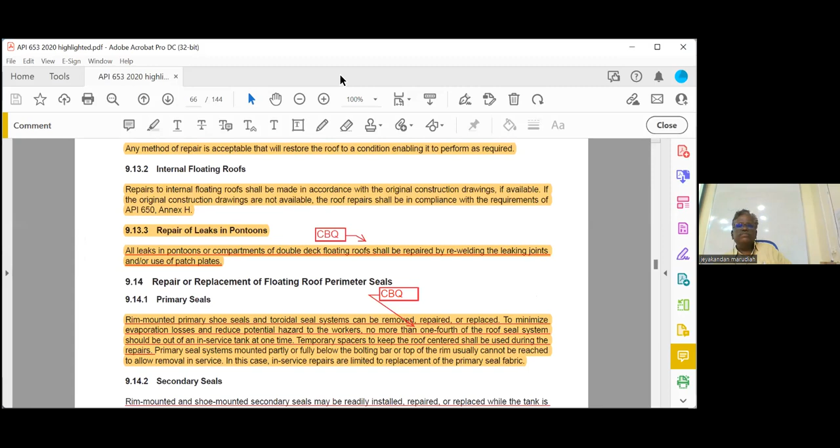Section 913.3. Next one - so 200 for carbon steel, 100 for stainless steel, A and B. Okay, next.

Widely scattered pits, and where the bottom welded is being replaced, cracks in the shell to bottom - all of the above, I think. So it is in the critical zone, we have to check - this is an important question actually. Section 911.1.2 - no welding or weld repairs are permitted except for welding widely scattered pits, pinholes, cracks, and shell to bottom - all of the above.

Next, welding a patch plate repairing a portion of the tank - maximum plate thickness of welded patch in critical zone is 1/4 inch. Check this and answer it. So the answer is all of the above. The recording stops. Okay.